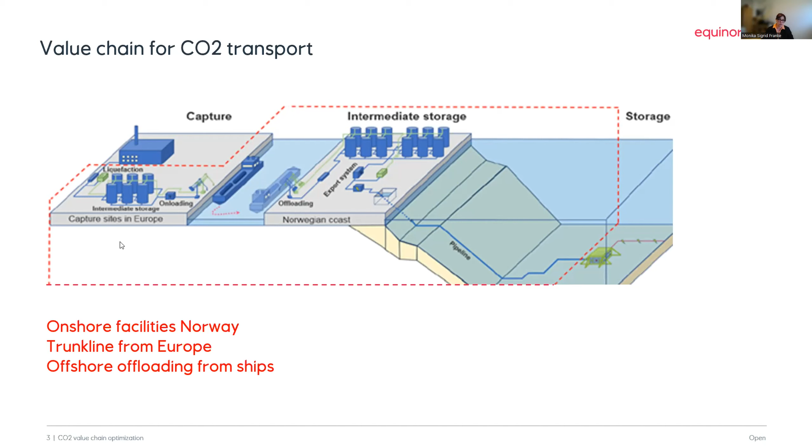So maybe I can just say one sentence referring to trunk line from Europe. I know that many of you know that the trunk line will be operated by Equinor, and it is around 1,000 kilometers where the CO2 will be transported from Europe to Norway as a final location. We can also discuss it more if you have questions later. But that's one of the biggest and more complicated solutions that we have. If I go further, let's see.

So Equinor puts a lot of importance on the CO2 specifications and the considerations in this area or to materials. And what I mean here is the materials selection for the pipelines, but also for the ships. And here we're touching upon corrosion, sulfide stress cracking, hydrogen embrittlement, and so on. And this is connected also to chemical reactions and thermodynamics and hydrates and so on. So that's one of the areas that we divide our research in.

We have also an area into CO2 engineering tools, and there are different activities from cost evaluations, flow assurance evaluations, process simulations, and safety, thermodynamics again. And then we have the last area that is CO2 facilities, and it's touching upon the storage, but it's not purely storage. That is ship transport and offloading structures and controls and what pipelines do we choose and sizes and metering and so on. So these are the three main areas for transport for CO2 that we work on. Let's see, going to the next one.

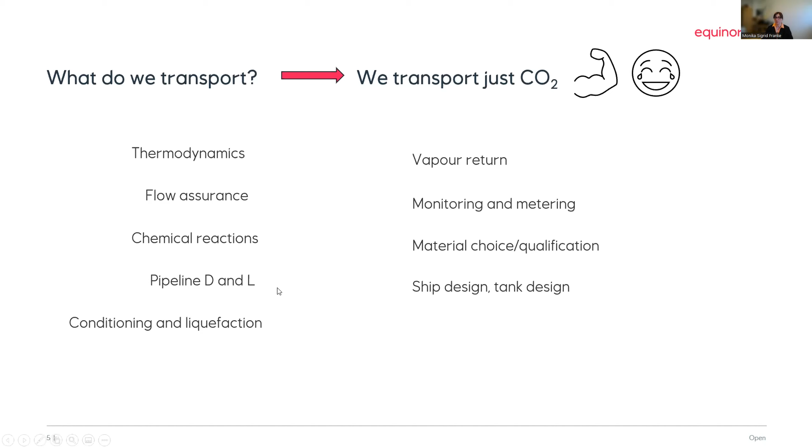Also, material choice and qualification, and that's connected to chemical reactions. How big the pipelines can be, what can we allow, what's practical, and to which extent conditioning and liquefaction will affect the pricing for emitters, as well as what is the result of choosing certain conditioning technology for the impurities. So it's not so easy as we might have thought many years ago. And many of you might know the specification that is published. And by published I mean this is not the last version.

There are always updates, but this is what is published. This is a specification for Northern Lights joint venture. And we have different concentrations of impurities that are listed: water, oxygen, sulfur oxides, nitric oxide, carbon monoxide, different amines, ammonia, and so on.

And this is, in a way, I could say, a shortened list. We are aware that there might be more impurities that can come into the picture. And of course, what we are doing is working further to understand the implication of the impurities.

I wanted also to mention that if we are talking about transport, today, of course, there are different options and sensitivities, but generally when we talk about ship transport, we can refer to temperatures around -25 Celsius and around 20 bar. Of course, we can deviate from these temperatures to a certain degree, and depending on the demands of the different project, this might change, but that's a general.

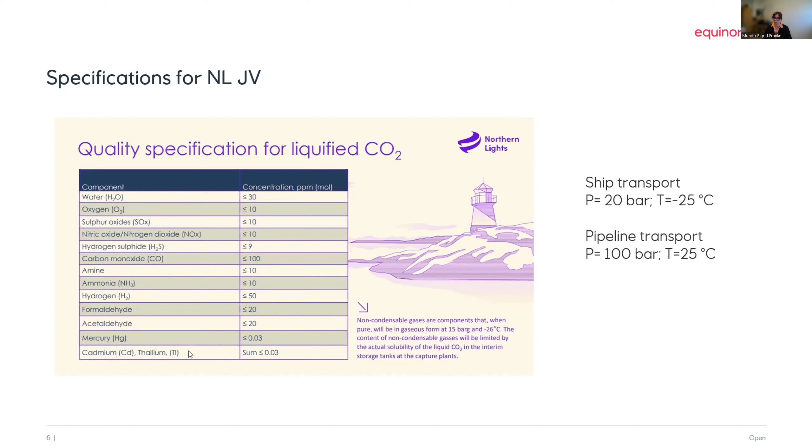And for pipeline transport, what we are referring to is 100 bar pressure and around 25 degrees Celsius. And again, of course, this is a little bit different. We can also say that 4 degrees is relevant if you have a pipeline at the bottom of the seabed, and so on. But that's what we refer to when we say pipeline transport or ship transport per today.

And then I wanted to challenge a little bit. I have shown in the previous slide the Northern Lights joint venture specifications. And these, of course, are referred to by many as strict. And one can see maybe a certain conflict that can arise between emitters and, for example, companies that will receive and store the CO2. The conflict is that different emitters will produce different impurities to different degrees. And the portfolio of different impurities is very, very long, very wide in range, in specifications.

And this poses a bit of a challenge: how is it for different emitters? What will they produce? How should it be handled? Is the specification that we are designing correct and good for both emitters and companies that will handle the CO2? So it's a balance. As you can see, for example, biomass fermentation can have alcohols, aldehydes, methane, H2S, and so on.

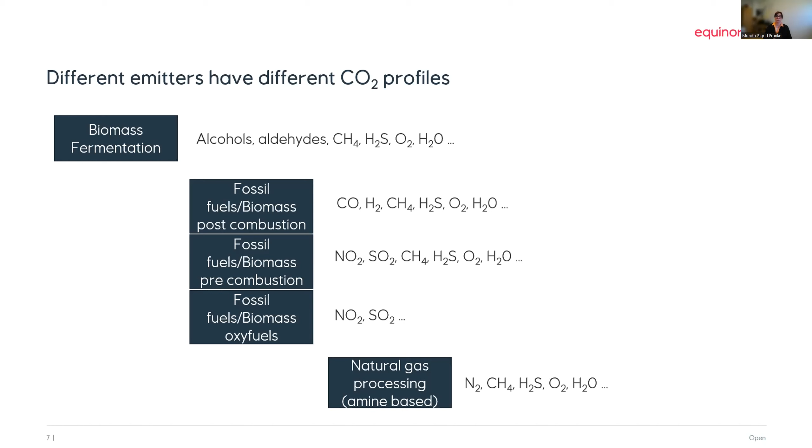And if we have, for example, natural gas processing, as long as it's amine-based, we will also have nitrogen and might have a lot of oxygen and so on. So the profile of the emitters is very different. And now the question is, where is the balance between the cost of purification and different methods, and all other things that the company that has to handle CO2 to store it has to incur. The purification costs can be high, but also the transport and storage can be quite high.

So we can have, as I mentioned already, unexpected phase situations, slugging and cavitation, and because of that, less effective flow. We can have metering errors because of different upsets. We can have chemical reactions that cause corrosion, and precipitation of different species that will affect flow and corrosion. We can have high toxicity and hazardous leakage to nature. And of course we can have hydrate challenges and ice and sulfur and carbonates and so on.

So I think the very, very big challenge in the value chain, as I see it per today, is how to set the specifications so that everyone will be happy. And that is a very big question mark today. But since I mentioned that I will go into key challenges, I would like to touch upon chemical reactions.

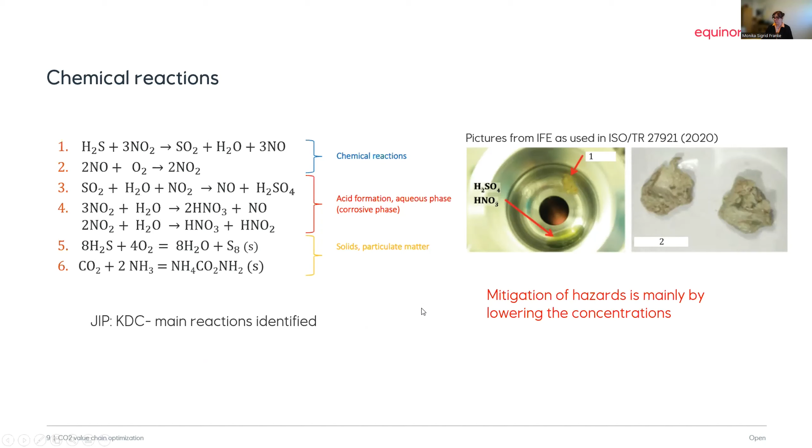And in the picture, you can see that the created acids were in the form of liquid. And then we also had different solid components, like sulfur or like carbamates. So let me go further. And I said I will share with you how the IFE rig looks like for testing chemical reactions.

And here I wanted to also mention that there is also work that Equinor is doing with DNV. I don't have the slides on the rigs, but I wanted to mention it because that's also a very important work where we study sulfide stress corrosion cracking, and also how that relates to general corrosion.

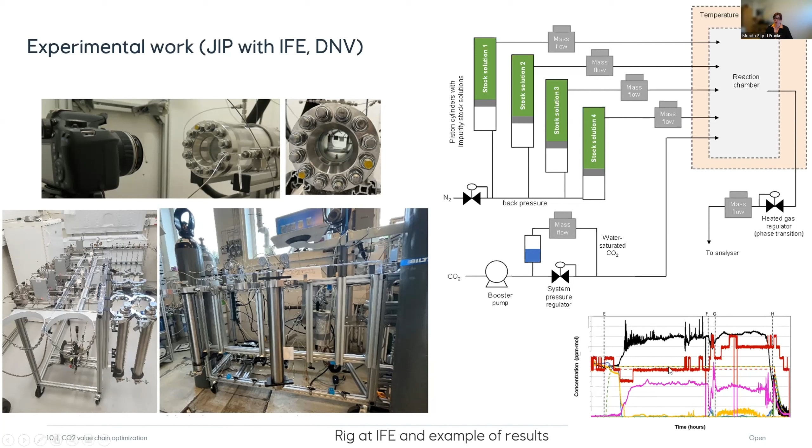And then we observe the reactions and we monitor them with the ProCeas instrument, and you can also see an example of what we get in the right bottom corner. So on the basis of what we see from the analyzer, IFE and the members discuss what we believe has happened, and if we created any different components that can then be tested and evaluated if they have influence on the corrosion and on materials.

And I also wanted to mention the last partner that we also work with, an extensive JIP with Wood, where we actually try to address with other companies all these different aspects of CO2 and their specifications to come to the guideline development. And here you can see that it covers most of the challenges and areas that I have mentioned, from thermodynamics to CO2 compression and pumping, to capture and conditioning, to metering and geological storage, and of course it should also include economics. So we hope that at the end of this JIP, together with other companies, we can come to certain conclusions on how to choose the correct specifications for different purposes.

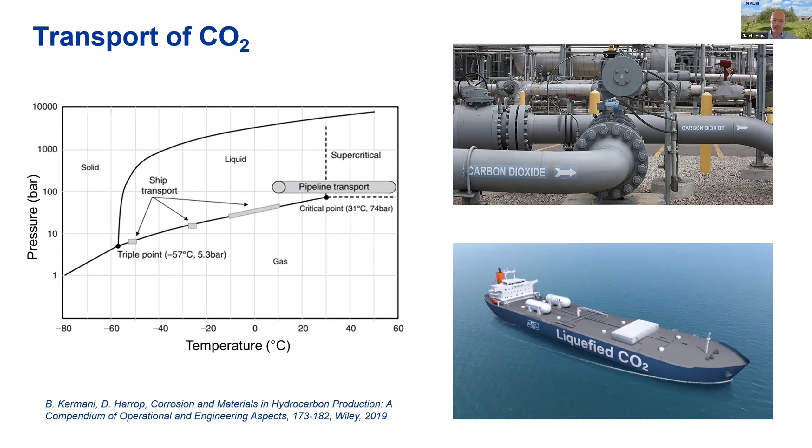And CO2 is acidic. Those of you that do chemistry will know that it dissolves in water and dissociates to form carbonic acid. And the CO2 that's present in oil and gas reservoirs can then acidify the aqueous phase that's transported in the pipeline. And this can lead to several different corrosion mechanisms. So the one that we're mainly focused on in dense phase CO2 is internal corrosion. You can prevent external corrosion of the pipeline using coatings and cathodic protection. But internal corrosion is more of a challenge because you can't really control what's in the fluid to the same degree.

And there's a lot of learning to be gained from conventional CO2 corrosion, but in dense phase CO2, there are a lot of differences as well. And it's those differences that are the challenge and that are requiring us to do more research to understand the corrosion mechanisms and therefore be able to mitigate them. And as Monica mentioned, a lot of the research going forward is about reducing the level of conservatism that is present because of lack of information. So the more understanding and knowledge that we gain about the system, the less conservatism that we have to build in, which comes with additional cost.

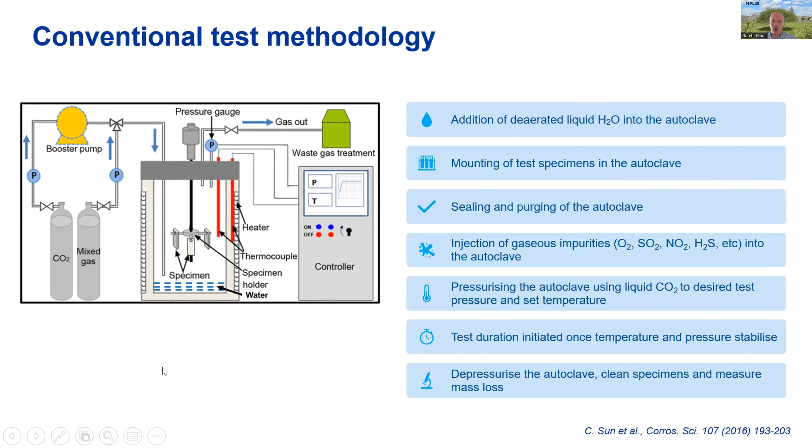Some of the details of the methodology vary, but most of these things that we've listed here are common to all methodologies. Now, the problem arises when you look at the literature, and this was quite surprising to us. We did a very systematic review of published corrosion rate data in the literature. And really, the bottom line is that there is no consensus whatsoever. There is a real reproducibility problem in the measured corrosion rates that are reported by different laboratories, and even between the same laboratories in some cases.

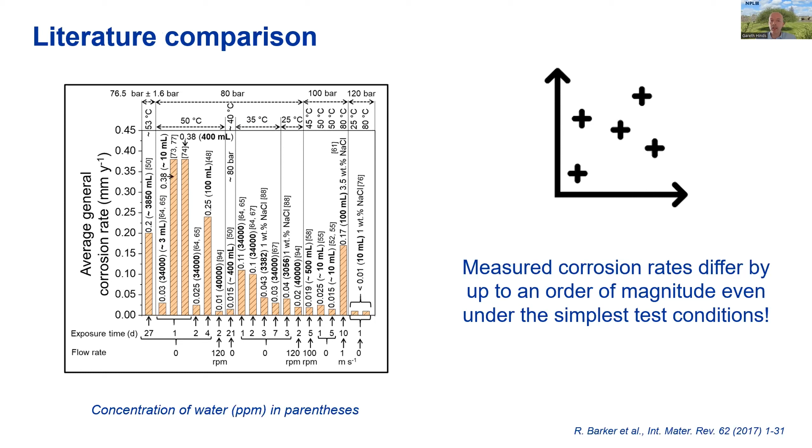So even under the simplest conditions where the only impurity in the CO2 is water, the measured corrosion rates can differ by up to an order of magnitude, a factor of 10. So, you know, this makes it really difficult to compare results from different laboratories or to have any confidence in the reported data that are published in the literature.

So what types of things influence the corrosion rate in a pipeline? Well, there are two types of factors: those associated with the fluid itself, so the level of impurities, the pressure, the temperature, and the flow rate, and factors that are associated with the material of the pipeline itself. So the grade of material that's used, whether it's stainless or carbon steel, whether there are welds there, the surface roughness of the material, and any stress, particularly residual stress from the fabrication of the material.

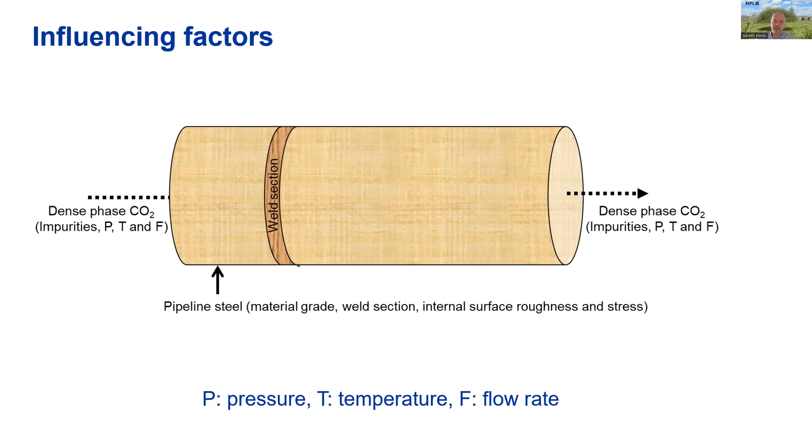But I mentioned water being the most important thing, and it really is. If you can keep water, and that is liquid water, if you can keep liquid water out of the pipeline, the chances are you won't really have any corrosion problems. And of course, that comes at a cost. If there's a lot of water in your inlet stream coming from different emitters, then it's going to cost you money to clean up that stream.

And so it's a trade-off between protecting the integrity of your pipeline over its design life by removing the water and the cost of removing that water. So as Monica mentioned, it's about finding that sweet spot between cost and performance. And we do that by gathering information and learning more about the mechanisms of condensation, the fluid transport, the thermodynamics of the fluid, and the impact of the impurities when they do condense on the corrosion rate of the material.

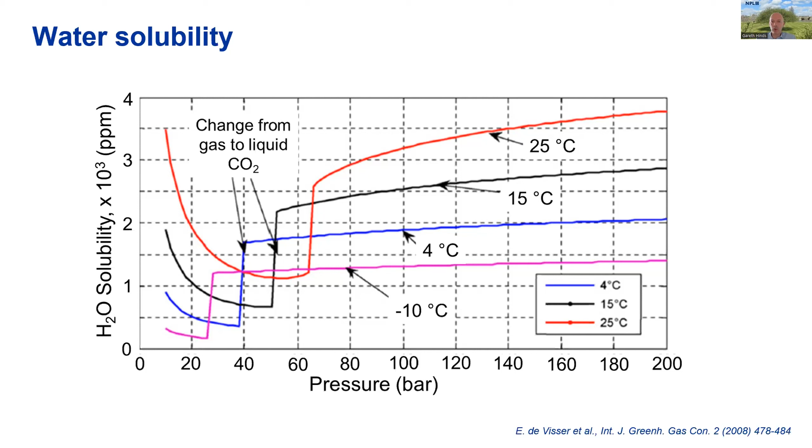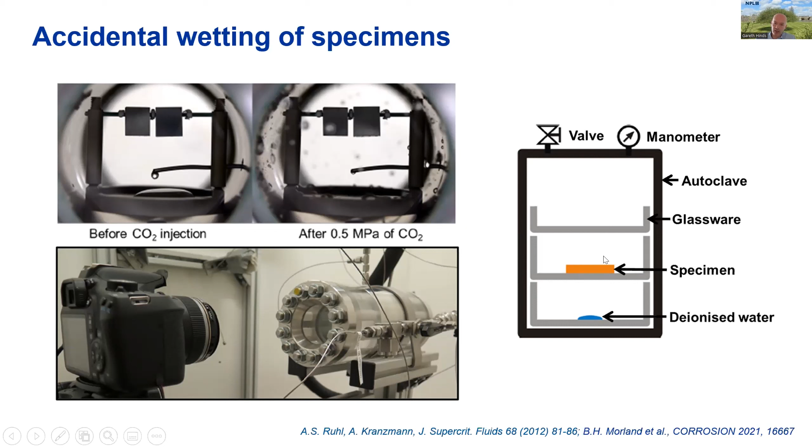From the accidental wetting point of view, these are some nice pictures from IFE that show the splashing of water on the test specimens. And what you can do about it is to separate physically the specimens from the liquid water so that any splashing that occurs doesn't actually impact on the specimens. But not every lab does this.

In terms of test duration, there's actually an issue here for people to be aware of, that the incubation time for dissolution of the liquid water in dense phase CO2 is actually quite lengthy. So it can take up to a day or sometimes even 2 days, depending on the conditions, for all of the liquid to dissolve in the CO2. And that means that if you don't wait long enough for that to happen, you're not carrying out the test under the conditions that you expect.

So to summarize, we do have a reproducibility problem at the moment in the published open literature on corrosion rate of pipeline steels. And this is because it's very difficult to control the conditions in these types of tests. We need a standard test method, and in my organization, NPL, we work on standard test methods. We have a long history of developing standards that can be rolled out to test houses that can generate robust, confident data that allow operators to make decisions, for example, on their CO2 specification and on their material selection.

So we've just kicked off a research program, and in fact, we are also involved in the joint industry project that Monica mentioned on the materials corrosion work package, where we're feeding in information on the development of standard test methods and how to control test parameters and generate more reliable results in testing.

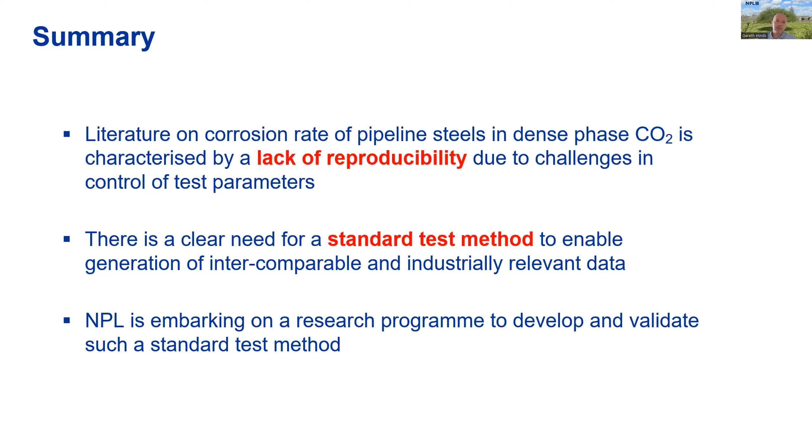So finally, just to step back a bit and ask the question, what are the implications of all of this on the CO2 transport? Well, firstly, at the moment, because of this lack of consensus on corrosion rate and mechanisms and how phase behavior affects corrosion rate in particular, operators need a high degree of over-conservatism in material selection.

So this means selecting a more expensive material in situations where you don't have enough information on the corrosion rate and there is a relative lack of service experience. So projects that are being delivered now are probably overcosted because of this over-conservatism. So this will have to change in the future with more research and with more understanding of these different mechanisms.

The second thing, and Monica's already touched on this, is that CO2 specifications are tightening all the time. They're likely not sufficiently conservative, particularly because of acid dropout. And this is where the different SOx and NOx and H2S impurities in particular can react together and combine with the water to form very acidic aqueous phases, essentially nitric and sulfuric acid that will eat through the pipeline material.

And thresholds for acid dropout are still based on very limited available data, and particularly data at low temperature. So we need to gather more information and more understanding on acid dropout in particular to be able to set more reliable and cost-effective CO2 specifications.

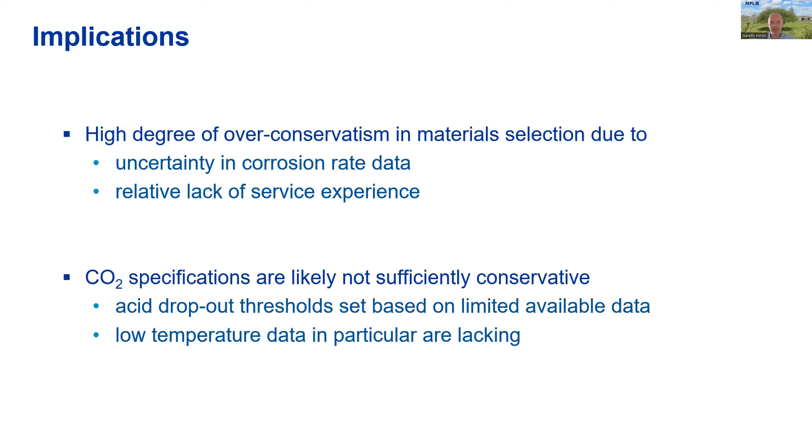I'd also direct anyone who's interested in more information on test methodologies for pipeline steel and dense phase CO2 to our recent review paper, which was published in Corrosion Science.

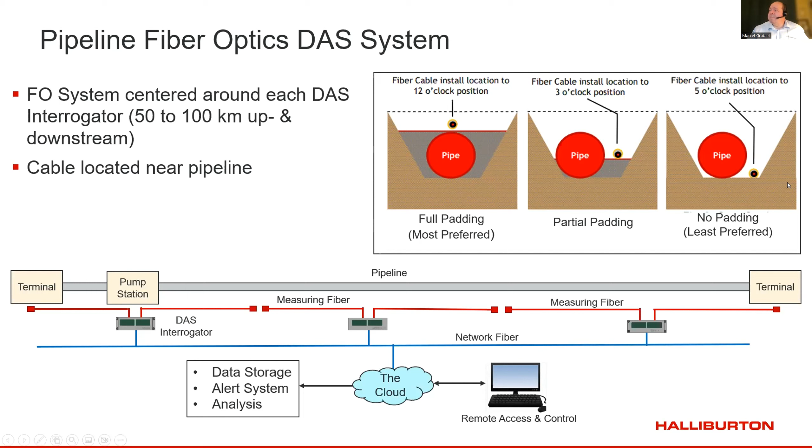So pipeline monitoring, you can do different things. One is event activity, and again, you're trying to figure out what is actually happening at what kind of distance. Those are automatic algorithms that are running and looking at the waterfall plot of the data. So generally you use advanced algorithms and maybe even machine learning, and you're trying to find out, is something happening in the pipeline, like a leak?

Do I have a scraper? How's a scraper or pig that goes through the pipeline behaving? Do I have any seismic events, animal movements, people walking by, vehicle movements? There might be some tree or brush cutting. There might be some excavation. That's always a danger for pipelines, because sometimes they run over a pipeline with an excavator, and now you can get a really big mess.

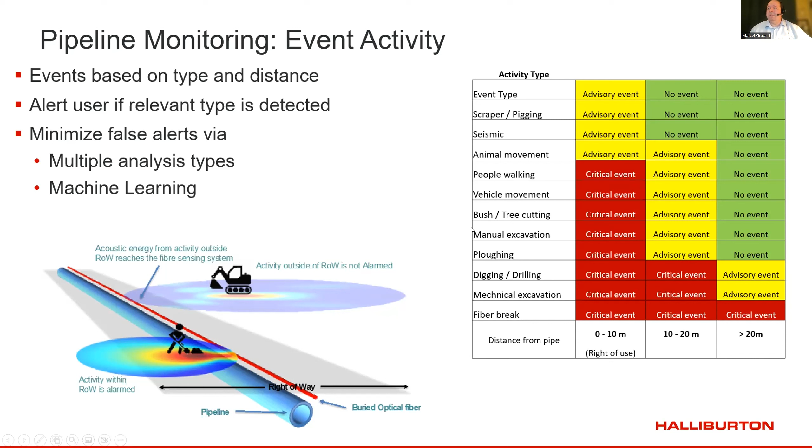So we are trying to figure out at what distance things happen, and as you get closer to the pipeline, you're getting a more urgent message to the operator that something's really happening, and we are trying to identify the event, and then they have to react to this, and that includes leaks. That's one of the most important parts of taking those measurements, because we are trying to figure out where and when those leaks are happening, and trying to detect those early, hopefully before we are even getting that leak.

And there's different modes that we can do. We can do negative pressure pulse. That's a methodology to find sudden ruptures. Now you have 3,000 psi in the pipeline. Suddenly, through a corrosion event, for example, you create a hole, and this ruptures, the CO2 is going to come out, and it's going to create the pressure pulse up and down the pipeline, very strong, and then you get the gas streaming out,

which is going to create a turbulent flow, similar to flow through an orifice, which is a signal that you can pick up very easily and identify. There's orifice noise, which is if you have flow through a hole, and generally it's a slower developing leak. You don't have the sudden rupture, so you don't see the negative pressure pulse. You mainly see the acoustic signal of the fluid going through the hole.

Then you have ground heave. You have fluid exiting the pipeline, and it's going to displace the ground. As this is being pushed towards the pipeline, towards the fiber, you're going to bend the fiber slightly out of place, and then you can identify that something's happening over there.

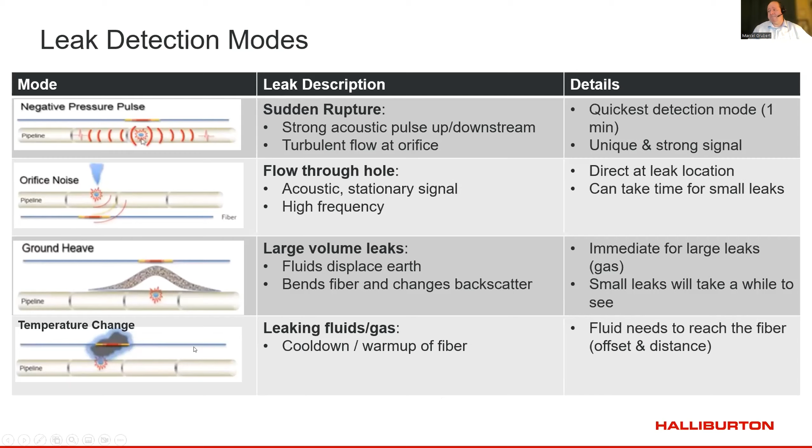And the fourth part is what's happening specifically if you have anything that develops from liquid back into gas, because it cools down pretty rapidly. You actually get a very cryogenic effect, specifically with CO2, and you can pick up the temperature changes as you get a leak. Everything cools down around that, and the bad thing is the pipeline generally gets very brittle when that happens. So just to give some quick examples.

We need to conclude because we're in discussion time already.

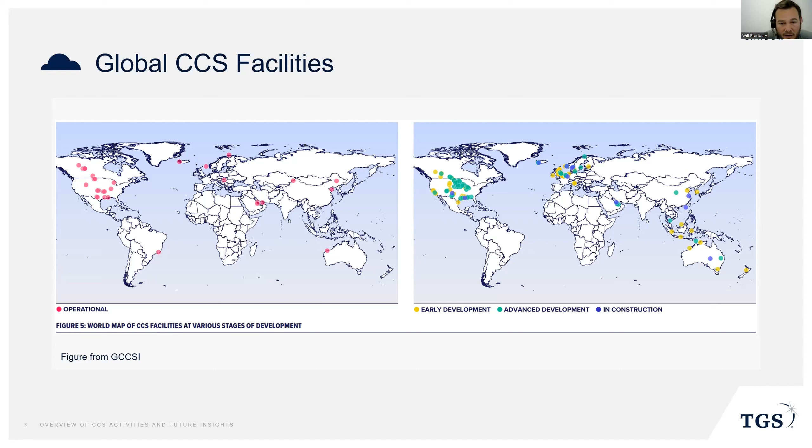A bit of an overview here on the different systems that are working in different parts of the world. So over in the US, if we start there, a lot of projects in advanced development. There's early development projects, there's in construction, and as we saw previously, there's quite a bit actually operational at this time as well. I think we're going to see that this will increase now that the Inflation Reduction Act is in place. 45Q has actually been extended as well. So those tax credit schemes are driving new projects across the region.

Very high level overview of what that might mean. You can see you do get a tax credit, $85 a ton for storage, $60 a ton for enhanced oil recovery. And then we'll drop into this one on the next slide, but $130 to $180 for direct air capture with CCS.

If we move over to Europe, it does certainly appear on the surface to be quite a more complex system, but obviously subsidies are playing a role here. The emissions trading scheme, we've seen certainly development in the price of that. And then within Europe as well, there are national level taxes, there are different credit schemes and so on. So we won't go into the detail of that one. There are a vast number of those different projects.

When it comes to the Asia Pacific region, then perhaps not as mature as the other parts of the world in terms of the regulatory environment or credit systems, but they do exist in this region. But I think what we're actually seeing in that region is more the development connected to LNG. So you do see projects, certainly like Gorgon. I think most people are aware of that. Gorgon is an offshore development, and then the LNG on Barrow Island. And then when we get to Moomba, that's the Cooper Basin project, again, connected to LNG.

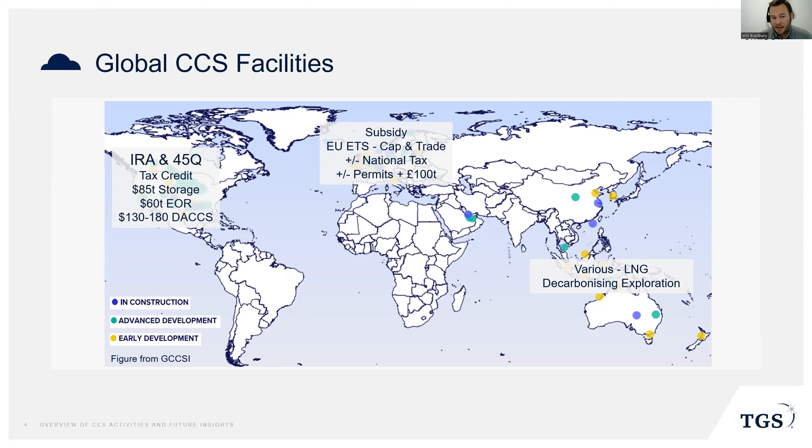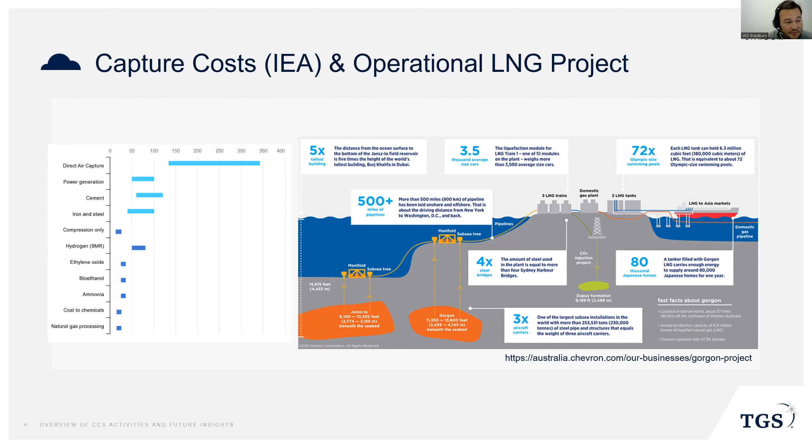What's quite interesting also about projects like this is it's a single E&P operator, or a consortium, I should say, a group of E&P companies who are operating it. So I think a lot of the discussions around the complexity with different projects, where all of the emitters essentially have different specifications of CO2, creating the administrative load and communication of technology and so on, could be more of a challenge for the kind of projects where you're looking at the decarbonisation of onshore industries. And many more stakeholders is probably the key thing to say in this regard, and they will all have different CO2 coming into the system.

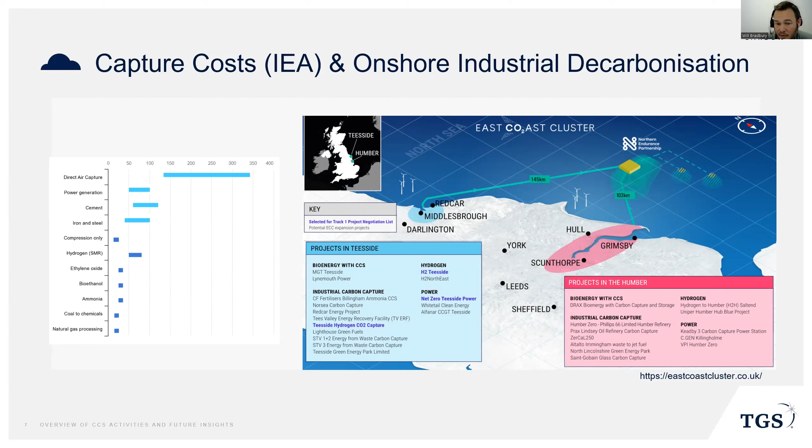And I do see that as two different types of developments, and we'll see how those develop, this sort of hub and spoke versus the LNG developments run by small groups of experienced E&P operators offshore. So a little bit of a look towards what will happen further.

So going back to the graph on the existing operational CCS facilities, and I'm sure some of the other speakers later on in this session will talk about this a little bit more. But we see these sort of gas-linked projects. Gorgon is one. There are others in Europe around Sleipner, Snøhvit, Moomba in Australia, and there are also many more. These are single point-to-point type projects from emitter to storage site. When it comes to the growth that we see linked to industrial decarbonisation, these tend to be much larger consortia, or at least there are many more stakeholders in projects such as the one I showed previously, the East Coast cluster.

Multiple sources of that CO2, and I'm sure there are challenges related to optimizing transport distances or other sensitivities, and so on. And I think this is probably one of the causes for why you have different incentive schemes in some of these different areas, in that you need to create the market for it, and then those projects need to be developed over time as well.

So really, that's a very high level and short overview of what's happening around the world. I think these hub and spoke industry adjacent programs, and then these LNG projects, will have different growth mechanisms and different incentivizations. For example, the LNG will grow as that LNG market grows as well, and hopefully that will grow in parallel. And we do see growth in that market. So I think there is going to be an increased need for monitoring technologies going forward into the future.

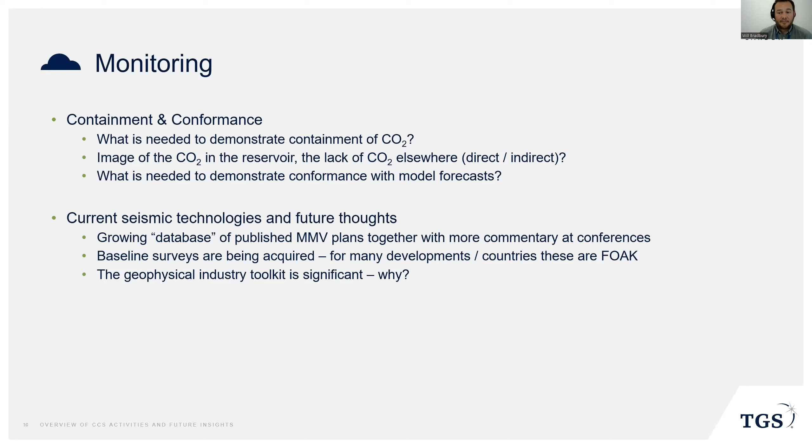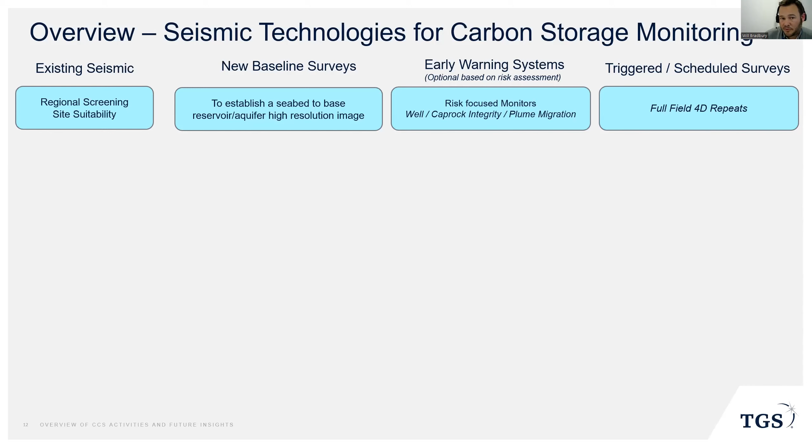A little bit, first of all, on seismic technologies. So obviously we have existing seismic data for regional screening, site suitability, new baseline surveys, and then potentially early warning systems. And we heard some talks about some of those yesterday as well. And then the full field 4D repeat, which comes later. As we move through that system, talking really about baseline surveys here: if you have a short duration survey, then you can have a slightly higher run rate on your cost and potentially a higher environmental footprint as well. When it comes to early warning systems, you need very long duration monitoring, which means you need a very low run rate, and you probably don't want to accept a very high environmental footprint.

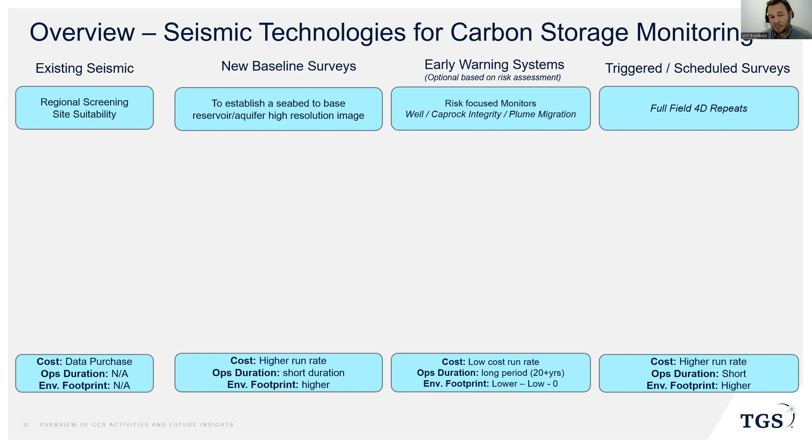Then of course your scheduled or your 4D repeat will be the repeat as well. So into that box, we put a number of these different technologies, really baseline surveys, DAS VSP, XHR, it's a short streamer solution. You have long streamers, you have nodes of various different configurations. In early warning systems, then we might talk about in-well fiber as a passive sensor, or as a DAS VSP application where you have an active source.

And we heard from the folks at Spotlight yesterday on using a very small number of nodes. Then we move into the repeat. As far as I'm aware, in terms of what's been done, we obviously have seen a number of longer streamer applications done for baseline surveys and so on. We've seen early warning systems, so fiber optics are installed many places around the world connected to oil and gas.

But I think as we learn more and more about these monitorings, how we apply those technologies, then we're going to be able to refine certainly diagrams like this. And I'd certainly welcome thoughts and considerations on what else should be added in here or what should be removed and so on.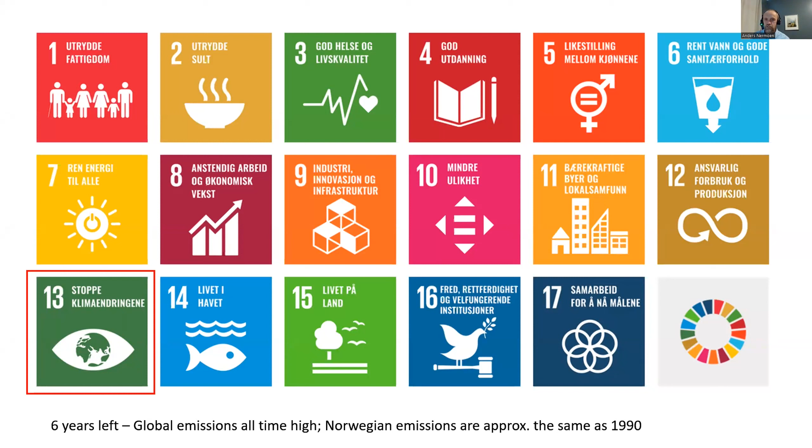So just first, we are committed to the UN development goals, and of course, curbing the climate change is really a key for me personally and for our institution. The global emissions are all-time high. The oil and gas recovery is all-time high, and of course, in Norway, the emissions are approximately the same as in 1990. And we know that a stable climate is a climate where the incoming radiation equals the outgoing and the reflected radiation.

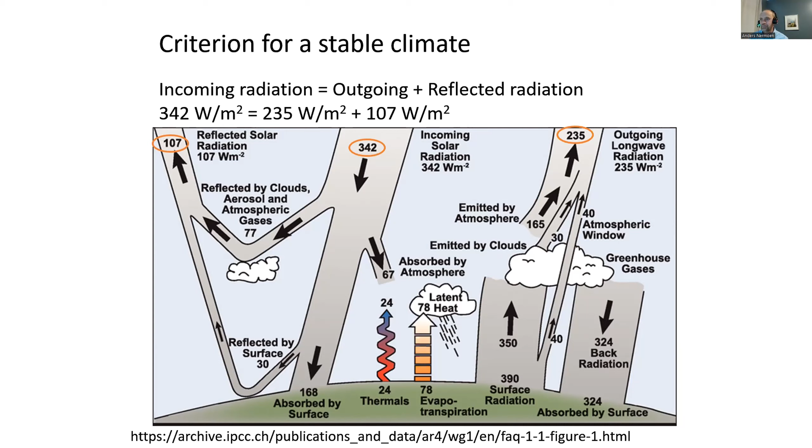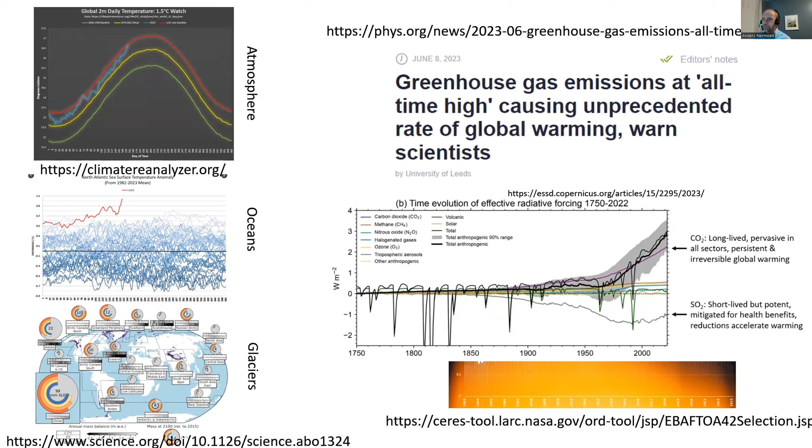And we learn. I always read phys.org as a physicist. We read that the greenhouse gas emissions are all-time high, and we know that this leads to an energy imbalance of approximately 1.4 watt per square meter, which equals 9 Hiroshima bombs. Was it each day? So there is a massive energy surplus, and of course there are different reasons for it, and CO2 is one of them. And we know that this leads to an increased atmospheric temperature, ocean warming, and melting of glaciers. And the questions are what the consequences are of these. So we learn a lot of this in the IPCC reports and the Paris Agreement.

And this session was called something with net zero society, and I think that we should address what that really means. And it means that basically, given the longevity of the CO2 molecule in the atmosphere and the prolonged nature loss,

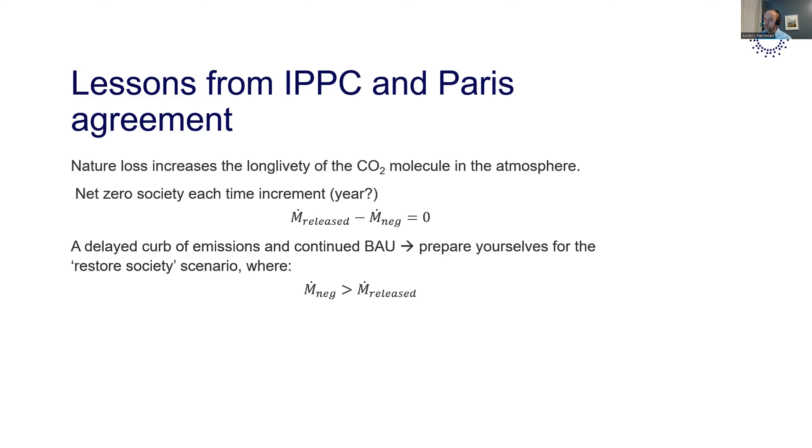making the longevity even longer, we know that each time increment we need to have net negative solutions that equal what we release. And if we delay curbing the emissions and we need to take the climate back into a stable zone, we need to prepare ourselves for the restore society that would come after the net zero society. We are not there yet, but we could end up there because we have natural tipping points. So,

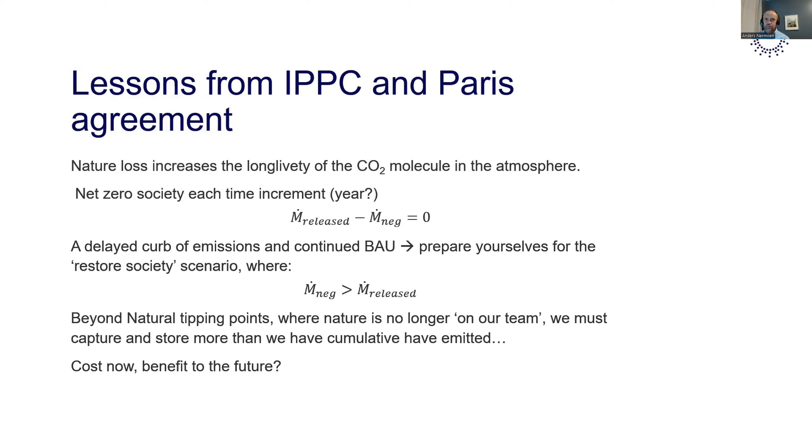and of course, CCS and carbon management is really important in order to meet these requirements that have been agreed upon and signed by practically all nations. And we're dealing with costs now and perhaps benefits for the future. That's the concept. And just to understand the anthropogenic CO2 in the Earth's atmosphere, it's important to know that we can avoid increasing, but this is not the same as reducing the emissions that we have today.

And it's kind of painful because we need to stop doing things, right? And that's not really in our heart, and we don't really have any technology for doing that. And so it's really difficult. So we're going to continue to emit, and then of course we need to have net negative solutions from the atmosphere or from the oceans.

And this could be technology-based solutions, and of course we have the nature-based solutions. A big chunk of those, and of course they can be nurtured and facilitated. Let's say reforestation of the Sahara, right? Could be something. And here we see the role of CCS when it comes to carbon management. Dealing with

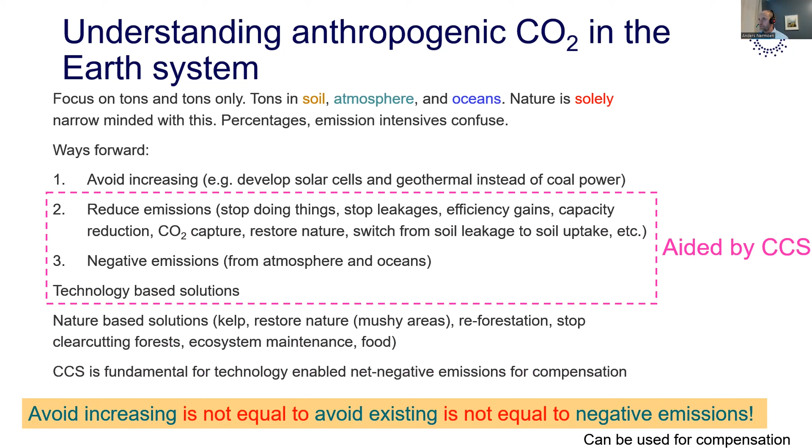the energy transition. Well, if you look at the history of energy use, we have traditional biomass here in the bottom, and coal and oil coming on top of it. It's basically molecular based. And once we find one new source of energy, we basically combine that with increasing the previous ones. So we have had an explosion of energy in the last 250 years or so. But there's been a dawning green shift the last 25 years, and we are entering now the green energy shift. So what does that mean?

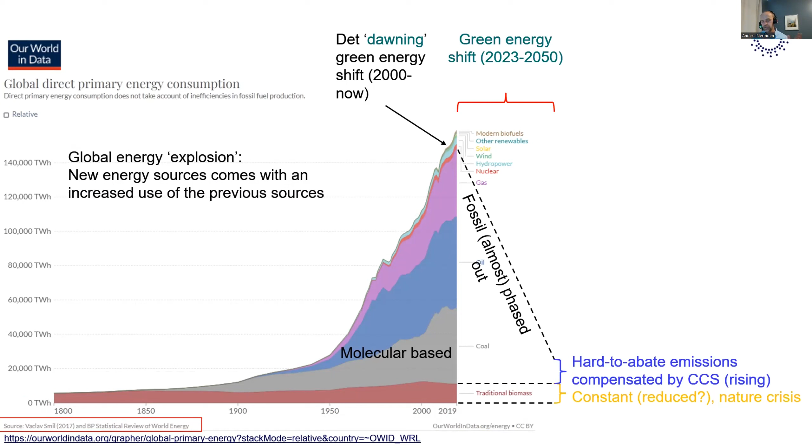Well, we cannot really rely on increasing biomass. I saw that yesterday, and I don't think it's realistic because we have a nature crisis to deal with at the same time. We could have reforestation. We need to phase out almost all fossil consumption, fossil sources. And of course, what we're left with needs to be compensated by CCS. When you read these pathways towards net zero society, this has been rising. 2 years ago, we talked about 5,000 million tons, 5 gigatons of CCS. Now, the latest is doubling that to 10 gigatons per year of storage.

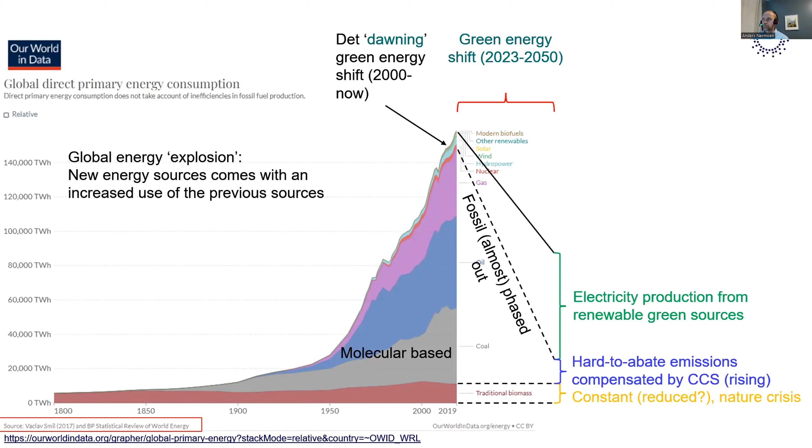And when it comes to the electricity, we're going to boost it, and we're going to have reduced consumption and efficiency gains. And is this really possible? Well, yes, I would argue it's really possible. 75,000 terawatt hours per year for 10 billion persons is, if you break it down to the persons, 7,500 kilowatt hours per person, which is 20 kilowatt hours per day per person. So it's entirely possible. So we can do this. The question is if we want it.

And so basically we have a build-out problem, but we also have an avoidance problem. The build-out problem, I think, is fully doable. Avoiding, we don't have any technology for that. Then we deal with regulatory measures and, of course, social engagement, social activities being much more important. So in order to facilitate compensating measures, we are going to go through now 3 examples of value chains and business models that we've developed.

So the first one was in the ECOBASE project, where we were establishing CO2 value chains for enhanced oil recovery in Southeastern Europe. And basically, it relies on 2 premises. First, that it is the only industry that can uptake, let's say, 1 million tons of CO2 per year, in that order of magnitude. Premise number 2 is that it is a segue for the oil and gas industry from producing oil and gas to using CO2

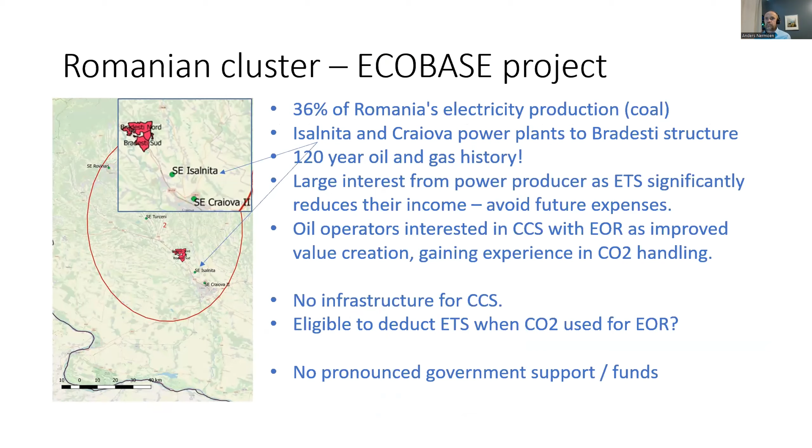We were looking into 2 coal-fired power plants. They have a really long history of oil and gas production in Romania, and basically we were evaluating decision alternatives when you're dealing with the oil company that could meet up with the coal-fired power plants. So we evaluated the outcome of these decision alternatives.

So basically, they could continue as of today, the do-nothing case, which would give you profitable going forward when we include all the costs, including ETS, etc. That has exploded since then. Or we could have a system where we develop the field and we have a full field immediately, or a pilot, and then go to full field development. And then we calculated the oil production as function of CO2 injection and the CO2 intensity. And we generated estimated monetary value of these decision alternatives.

We also went to Turkey, where we evaluated the Bati Raman oil field, which is a heavy oil field from a carbonate reservoir. It's the biggest oil field in Turkey, and they had a primary production period until the 1980s, 84, where they discovered Dodan, a natural CO2 deposit, 70 kilometers away from the oil field. And they developed a pipeline between these 2. This is not pure CO2, and it's been running for 40 years.

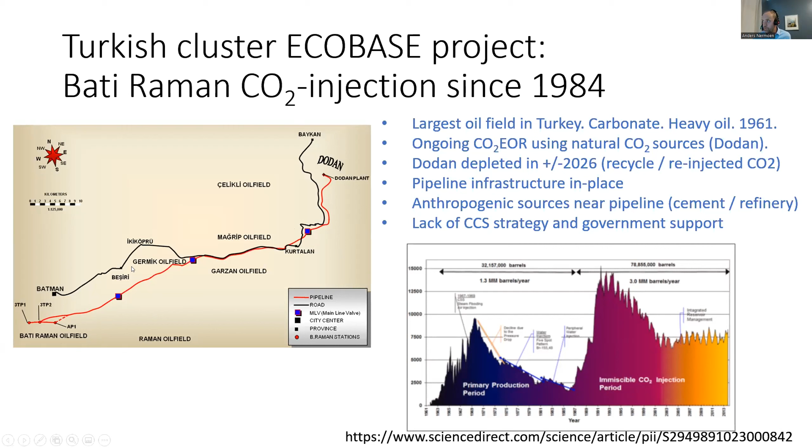But the problem they're facing now is that Dodan is near depleted. So of course they started to recycle and re-inject the CO2 at the production site. But still, they always lose CO2, so they need more CO2 to have this oil field up and running. So there's a cement factory here in Kurtalan, and then there's an oil refinery south of the Bati Raman oil field that we were working with to develop this decision tree and evaluate the monetary value for the different alternatives.

And basically, there's positive net present value, even from the business as usual, if you have the refinery capture, refinery and cement at different times. So this basically gave us some confidence that we could work with different players in the field, and we could go forward.

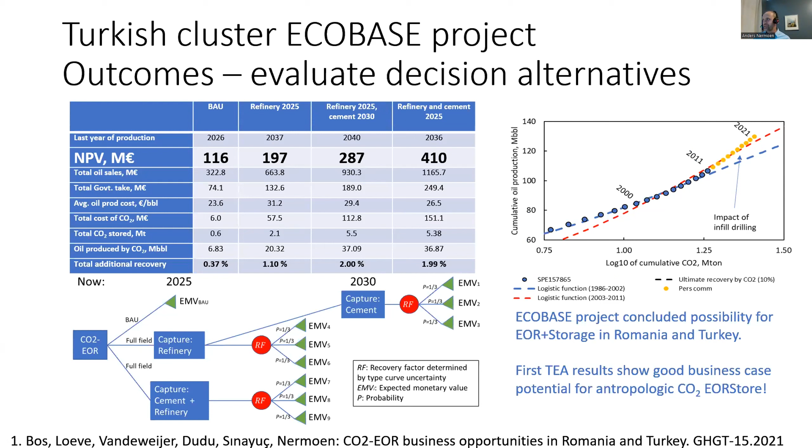We also have friends in the Czech Republic that we worked with before, and we recently developed a project, which ends next year, where we want to mature an existing oil and gas field to become a CO2 storage pilot. This field was discovered in 2001 and has been operated by MND. The premise here is that having storage available is a fundament for carbon management in any CO2 intense region, because there are lots of CO2 emitters in this region. And we used the EU storage directive deliberately to generate the work packages in this project.

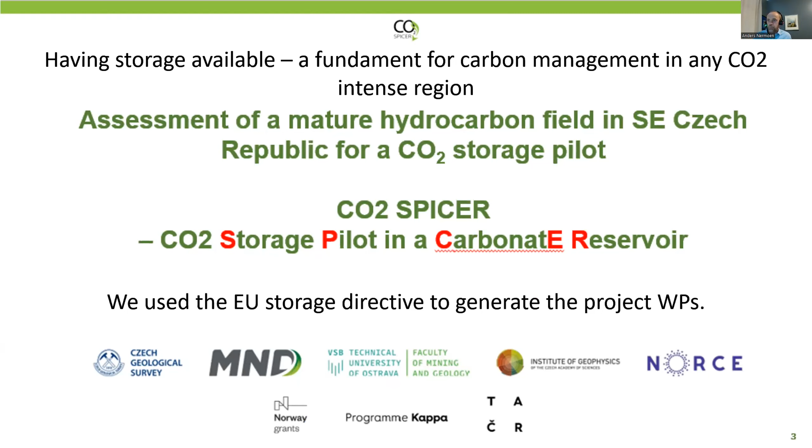There is a lot to say here, but closest to my heart is geomechanics. So I'm going to focus on that. The illustration is basically that the geomechanic work is used in all other work packages, when it comes to the geological model of the storage complex, dynamic modeling and simulations, what pressure domains we can operate safely within. We are working closely with geochemistry. How does the chemical reaction lead to mechanical changes?

Risk assessment is obvious. And of course, we work together with the monitoring plan and the scenarios for future site developments, because we are constraining the total injected CO2. I'm going to show you this now. But of course, there are cross links in all other directions here as well.

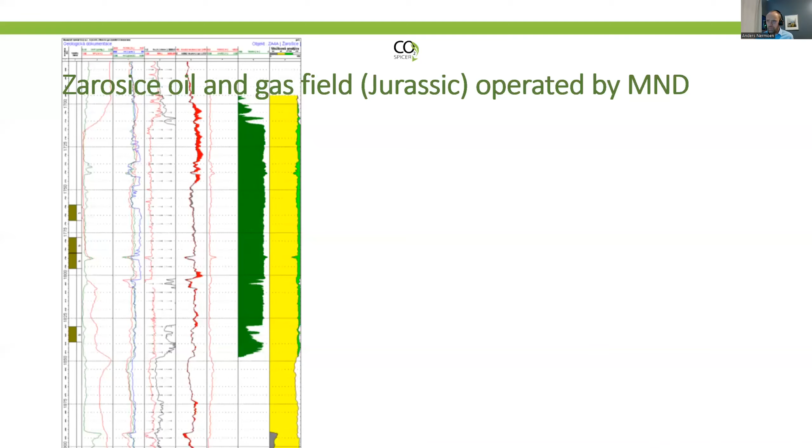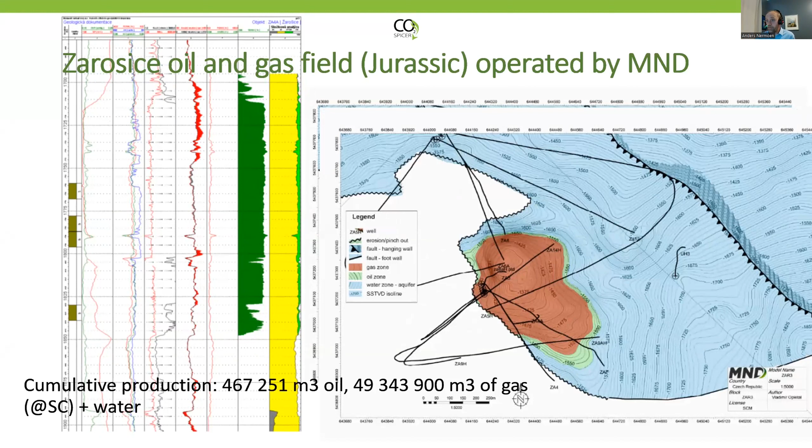We are basically here at the border between Austria and Slovakia in the Zarosice field, and we are looking at the Flysch belts in the Vienna Basin. We are targeting the Jurassic formation, and here you see the fluid displacements, originally oil, gas, and water, and then it has been producing for a while, and the gas cap has expanded, and the oil zone has lifted up, and it's approaching depletion, and we're looking at how to use this asset for CCS.

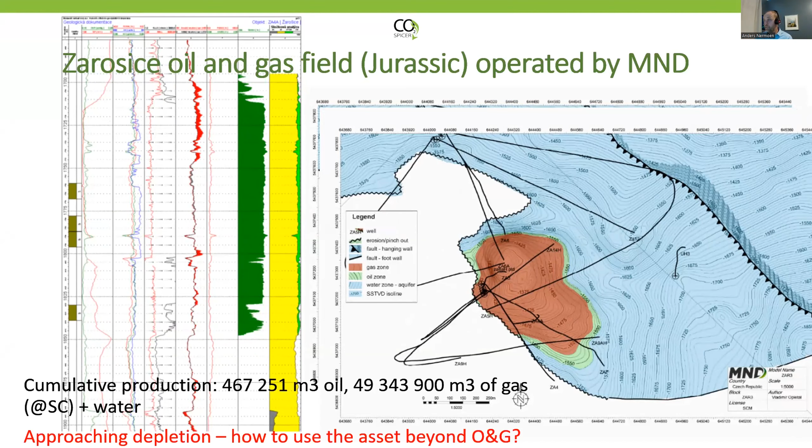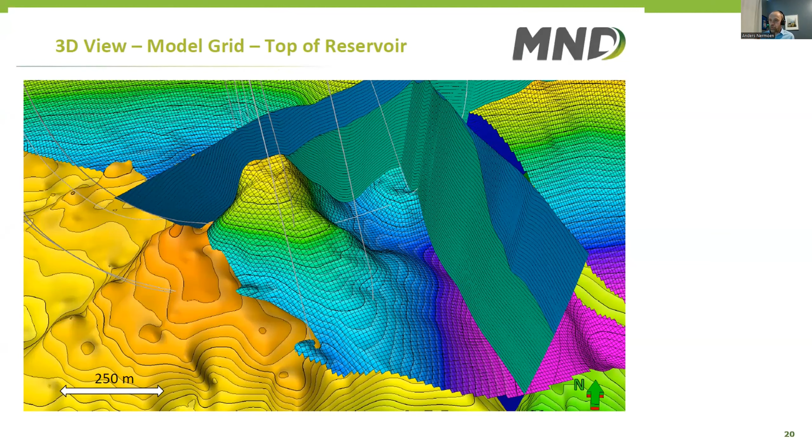A 3D picture of this thing, and we are mapping the different formations here, and we are determining the strength of these rock types. Based on the oil and gas company's seismics and geological model, there are no weak planes and faults crossing through the main storage unit. So when it comes to geomechanical assessment, we needed to rely on the rock strength itself.

So basically you do that and you evaluate in this tau-sigma space, where tau is the shear force and sigma is the normal force, and you have these Mohr circles, and you take the tangent of those and you calculate the stresses needed to break the rock.

And then we estimated what the stresses are in the field. And when you combine the strength of the rock here and the possible stresses, there are some uncertainties there. Well, it looks all good, all safe. We can just go along. But then we were interested in what happens when you start to re-inject and cool down the reservoir.

So then it's not that simple when you're doing it in tau-sigma space. Then you need to do it in PQ space, because previously the stresses are shown as circles, and in QP space the stresses are shown as dots. And Q is the deviatoric stress, the principal stress differences, and the mean effective stress is basically the average stress minus the pore pressure.

And when you repressurize, you reduce P prime. Basically, you push the point to the left. And if you cool down the reservoir by delta T, you reduce the side stress. Given that it's weight dominated and it's constrained on the side, we can calculate the side stress reduction, basically increasing Q and reducing P further. And of course, all of these factors have been experimentally derived.

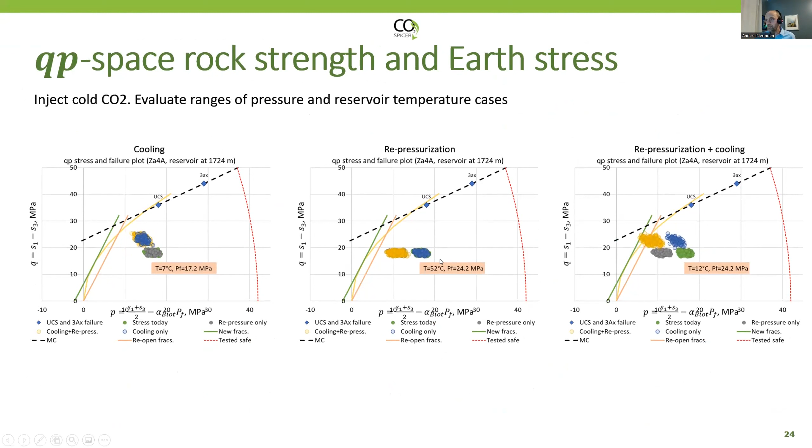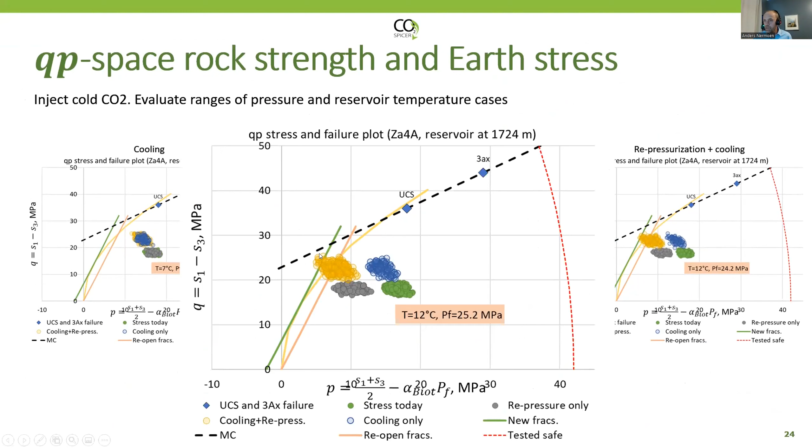And when you do that, you see that cooling leads to a shift upwards. Repressurization brings you to the left, and for the combined effect, because we are sampling from probability density functions, we can calculate the number of instances that lead to failure. And then we can develop these phase diagrams where the probabilities of failure are calculated with regard to reservoir pressure and injection temperature.

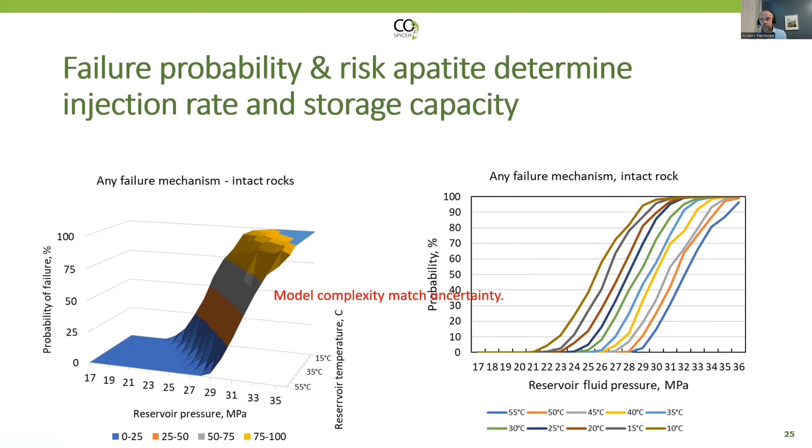And of course, combining the failure probability with the risk appetite is important when you want to assess the injection rate, if you need any warming up of the CO2 before you inject. And it's also important to determine the storage capacity. So we made here a model that was matching the uncertainty in the field.

So how this is integrated into the whole system is what we are dealing with in the STRATEGY CCUS. And I see that I'm running out of time. But the purpose here is that we made a model that evaluated scenarios, which is a future pathway to a series of events. It's a point estimate. And we used this for a regional comparison of 8 different storage regions in Europe. It enabled us to quantify the consequence of modifying the concrete and practical build solutions, and it forced us to agree upon some basic principles for the CCUS economy.

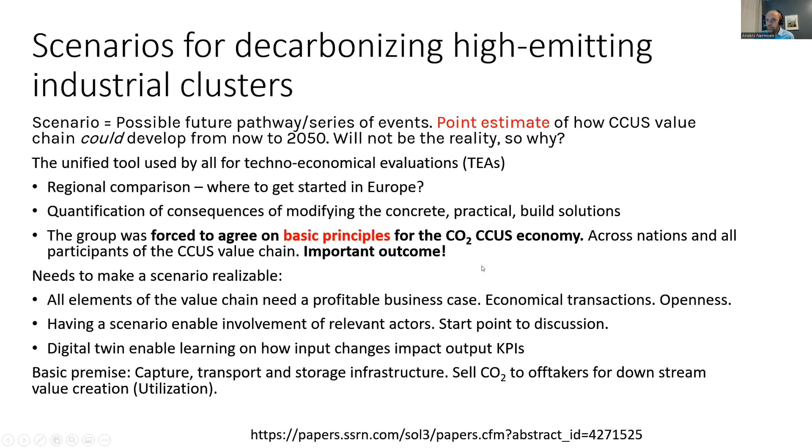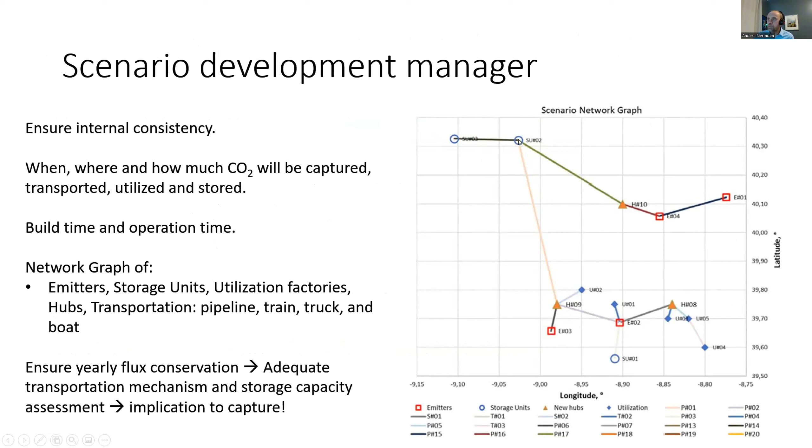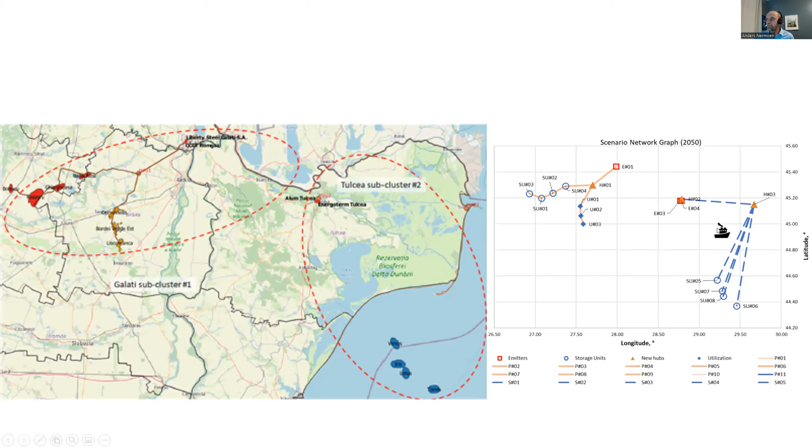It's basically built on scenario network graphs where we connect storage units, hubs, and emitters to each other, and we calculate the capacity of each segment of this network and each node, the storage location, emitter, and we get to regional key performance indicators on energy use, capital expense, operating expense, and build time. And we have different transportation units, and it's quite an achievement, I think. It also uses what we call global inputs. I'm out of time. That goes through the whole analysis, and we are able to generate the KPIs for the different units.

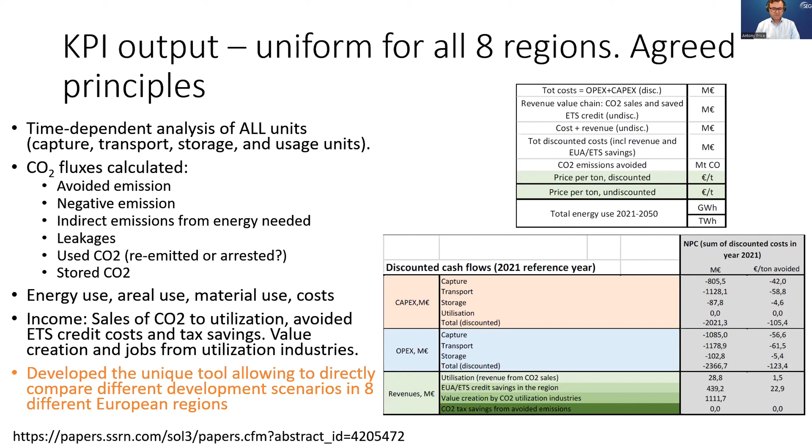My name is Kirsten Haaberg, and I come from Gassnova. Gassnova is a state-owned enterprise that was established in 2005, and it should advise the Norwegian government on CCS through the CLIMIT program, which I will talk more about, the Technology Centre Mongstad, which is the test facility, and the Longship project that will set sail next year when they start injection into the underground in the North Sea. It should also facilitate development of technology and competence to ensure cost-efficient CCS solutions, and that's where the CLIMIT program comes in.

We support in CLIMIT both standalone projects and also projects that run for longer periods and that follow naturally in the development to higher and higher TRLs. We'll talk a little bit more about that split later, but we're, for example, very proud of this

Aker Carbon Capture technology project that has run since 2005 with the test of 100 different types of amines at NTNU and Tiller in Trondheim. And then they ended on the amine that Aker Carbon Capture are using today, and it was further tested at TCM, and then they built a mobile unit that is now used, tested and further developed at Norcem, and is then also part of the Longship project. And in addition, we have, of course, supported many other projects in both capture, transport, and storage domain.

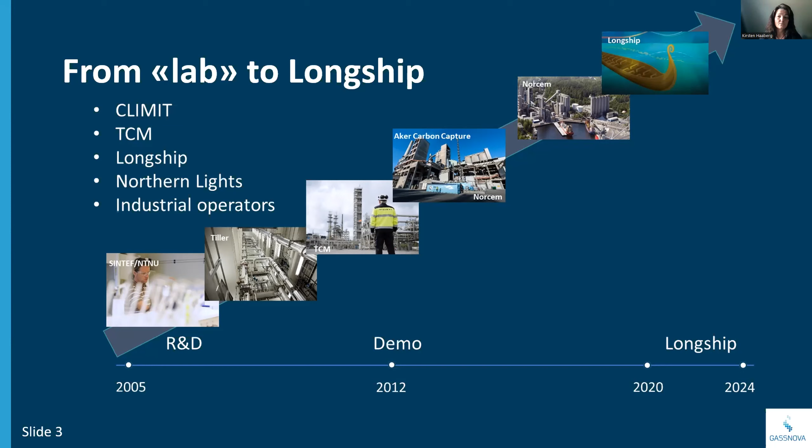And all along with the increasing TRL, we wish that there is an increase in the industry participation to show that the industry is really interested in the technology, that it has a life after the project has ended.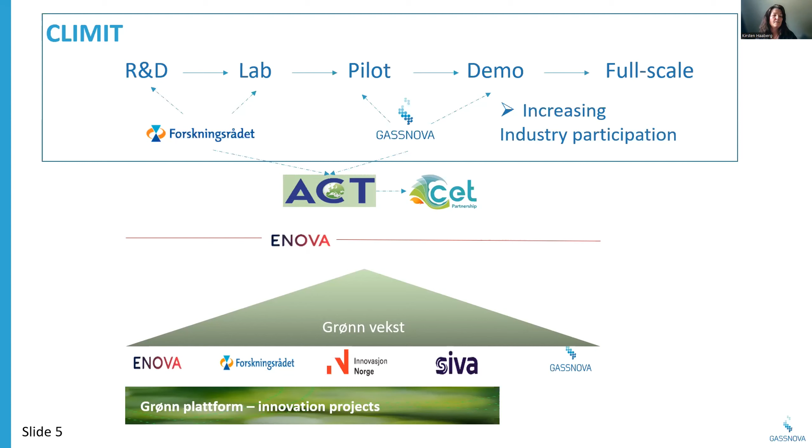Then we have something called Green Growth, which is more a deal to strengthen and develop the coordination and cooperation on green growth. And it is run by these 5 companies here, Gassnova, Siva, Innovation Norway, Research Council, and Enova all together. And then you have Green Platform, which is run by these 4 above here, and they're more on the innovation side of projects. So there are several different ways to get funding within Norway, but also in international projects.

So what kind of projects can get support? You have idea studies. They're like smaller studies to grow the project into perhaps a larger application. And the maximum support there is 200,000 Norwegian kroner and 50% of the total cost maximum. Then you have technical economical feasibility studies and support for testing technologies on pilot scale. Those are the 3 main types of projects that we give support to. And normally it's 50% support, but the ESA regulations give the variations here, depending on if you're a small company and what kind of partnership, etc.

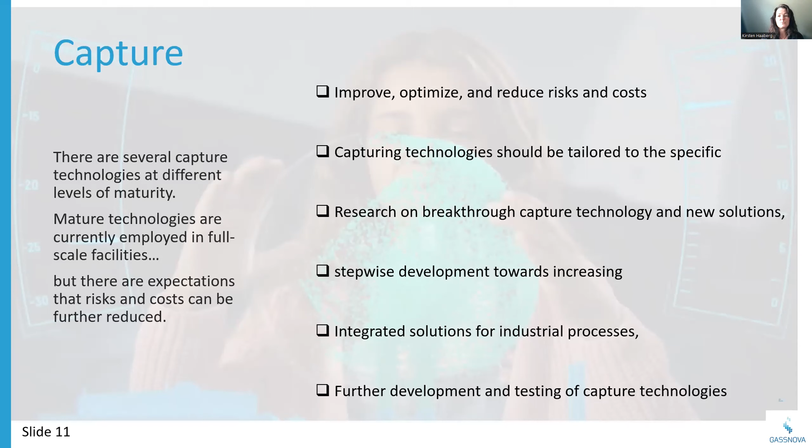One should look into capturing technologies that should be tailored to specific industries and consider factors such as available waste heat, space requirements, electricity consumption, and tolerance for various types of flue gas compositions. There should also be research on breakthrough capture technology and new solutions, including development of sorbents, solvents, membranes, etc. There should be a focus on faster stepwise development towards increasing maturity and substantiating the long-term potential for a capture process.

There should also be integrated solutions for industrial processes; simultaneous CO2 capture, hydrogen production with CO2 capture, and air or ocean capture are also areas of interest. And finally, there should be further development and testing of capture technologies ready for scaling up to pilot or demonstration scale, including low temperature capture, solid sorbents, oxy-fuel technologies, and hydrogen combustion.

On the transportation, the program can support projects that will help reduce risks and costs for CO2 transport. In addition, the program can support the development of technology and innovation that facilitates the financing and commercial operation of CO2 transport systems. And here relevant areas are how impurities in the CO2 flow affect thermodynamics, characteristics of the CO2 mixture, the corrosive environment, precipitation, and flow conditions in the transport system.

For materials, research into and testing of materials throughout the value chain is of importance. And then one also should develop software for simulation of multi-phase CO2 flow. Design of ships and loading and unloading systems, including offshore unloading to liquid intermediate storage or direct injection into storage formations.

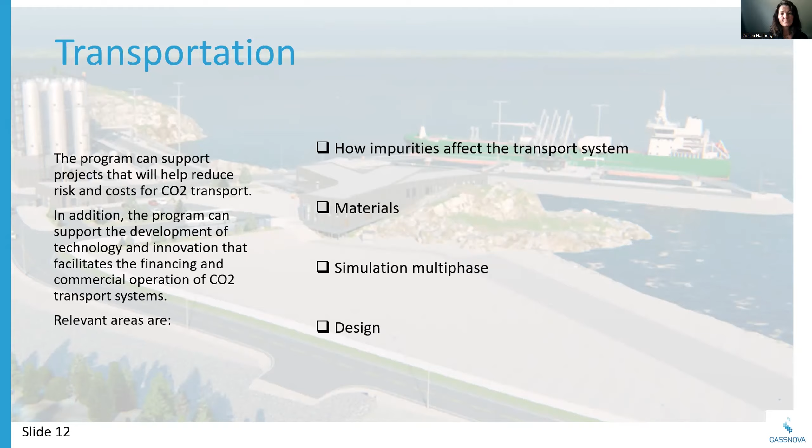Finally, it's the storage part. Research, development, and demonstration in the following 5 areas are prioritized. You have CO2 wells, where one should look into improving, streamlining, and securing well drilling, safe injections, and subsequent well plugging, and direct injection of CO2 from ships.

On the storage reservoir and cap rocks, CO2 injection strategies and water production from reservoirs suitable for CO2 storage are of interest, pressure control, cap rock, and sealing mechanisms. For monitoring, real-time monitoring is of interest, CO2 storage sites and the marine environment both, including, of course, storage operations, shutdown, and post-injection. And here one also has to look at risk and mitigation.

For the modeling and digitalization, it's looking into artificial intelligence, automation, to handle capacity, injectivity, sealing, monitoring, and flow properties, and also here as well, risk management. And finally, the social sciences, where you have simplifications and standardizations, looking into hubs where different storage sites can work together or get the CO2 from hubs. And also social science research, looking into legal matters and incentives that can contribute to a market for CO2 storage.

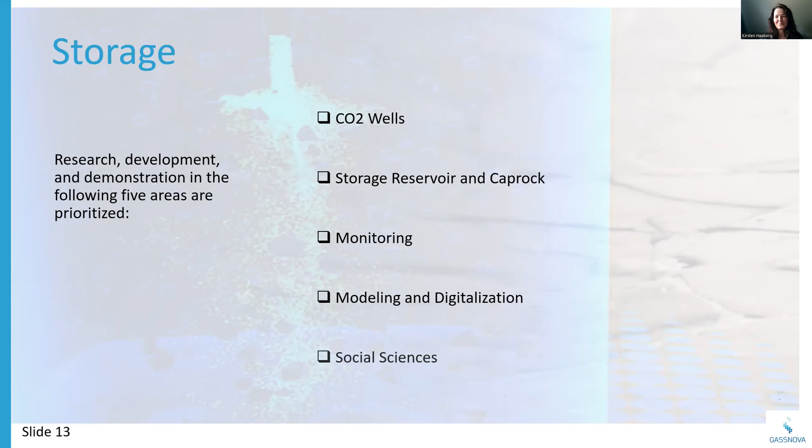Thank you very much, Kirsten. Interesting overview of quite a large body of work over quite a good period of time. This will be a fabulous help for everybody else moving forward.

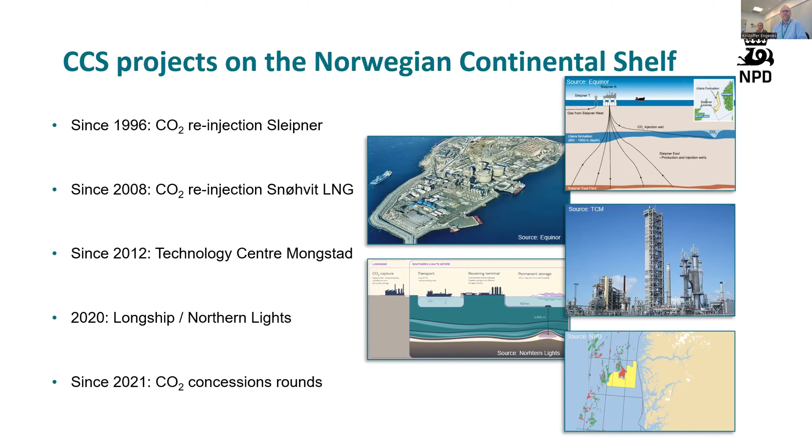The sedimentary basins of the NCS are generally well suited for CO2. So this is just a snapshot of the database that we have access to in Norway. This, of course, has built sound knowledge about geological formations such as saline aquifers and depleted reservoirs. All are considered candidates for safe storage. It is key that the reservoirs are sealed, obviously, such that leakage is avoided.

We have good control of reservoir seal pairs and other potential leakage mechanisms, such as fault patterns, fracture pressure gradients, and well integrity knowledge across many petroleum licenses, which are also important to be on top of. And to facilitate all of this, we have in Norway a well-established and available subsurface database of public data. This is hosted by us in NPD through the Diskos database platform. This should obviously be utilized by everybody actively in the evaluation of CO2 storage candidates in the future.

So the CO2 license definitions, just to repeat something you may already know: we have 3 levels of license definitions. One is a survey license. This is the simplest version that gives the right to explore for subsea reservoirs. It does not give an exclusive right to explore in the areas mentioned in the license, and neither does it give preferential rights in the assignment of exploration licenses for a subsea reservoir for storage. That means this is a type of license where you can go out and acquire data, but you will not get access to the area for further exploration and exploitation, which is the next level up.

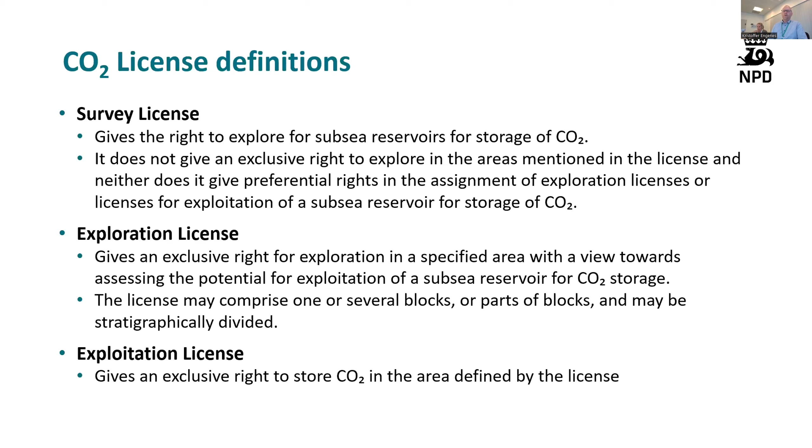The first CO2 license, so the first license for CO2 injection and storage, was awarded by the ministry back in 2019. This is the exploitation license EL001, which is operated by Northern Lights. This again consists of companies Equinor, TotalEnergies, and Shell. Following the approval of the development plan for the license, we noted an increasing interest for access to CO2 storage, and the applications continued to grow.

So for the CO2 storage application process, we have a so-called open door policy. This means that individual applicants seeking a license pursuant to the CO2 storage regulations can apply when there is a sufficient technical and business requirement basis. So it's fundamentally important that you have a technically robust plan and solution, but it has to be backed by a business requirement. That's why this is a kind of open door on a request basis as of today.

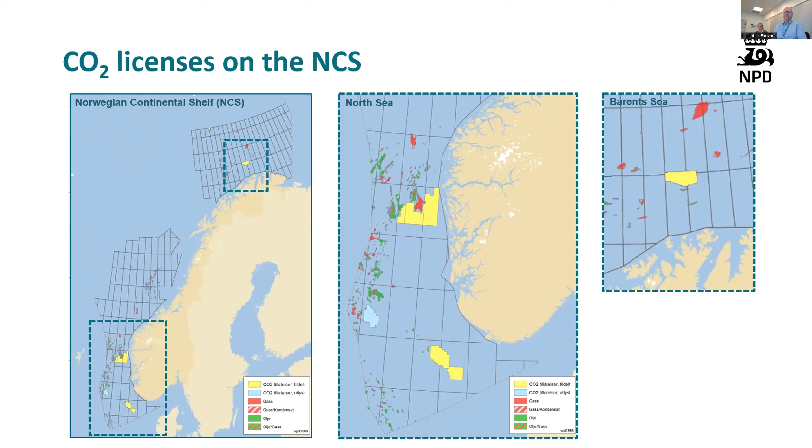So for now, 6 licenses have been awarded. All of them are in the North Sea, except one that is in the Barents Sea. There is an increasing diversity of industry players now engaging in this business, and so far 10 Norwegian and international players have secured acreage. In alphabetical order, they are Aker BP, Cape Omega, Equinor, Horisont Energi, OMV, Shell, Stella Maris CCS, TotalEnergies, Vår Energi, and Wintershall Dea. We expect the player picture to diversify even further going forward.

Okay, so this slide shows the licensing process as of today for both companies and the government. The company submits an application which needs to be according to the guidelines, and the MPE and NPD assess if the application is of sufficient quality. If yes, the area can be announced. And for announced areas, normally it has been given a deadline of 6 weeks for submission of application for a license. For both exploration and exploitation permits, financial strength and technical competence are essential.

And when awarding an exploration license, there will be arranged negotiation meetings, and it will be given an obliged work program. And when given an exploration license, the work program normally will include submitting a plan of development or a relinquishment.

So CO2 permit application requirements: detailed requirements are found in the guidelines for application of license. But main takeouts are potential for CO2 storage capacity, risk and probabilities, a description of the CCS project, geological and technological assessment, development plan, monitoring program and license work program, and environmental assessments.

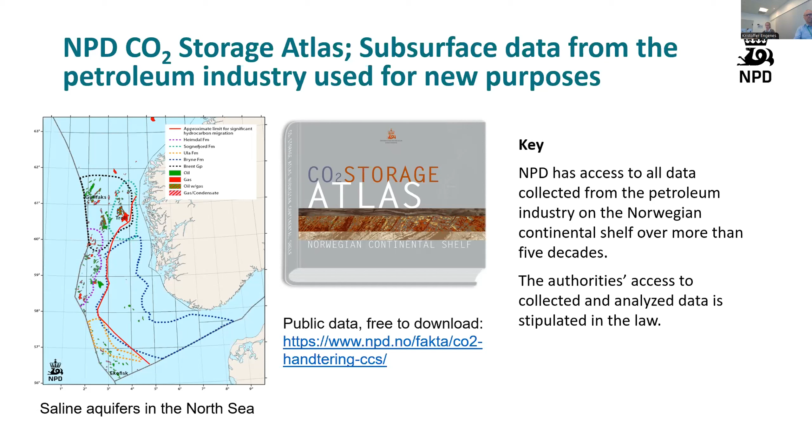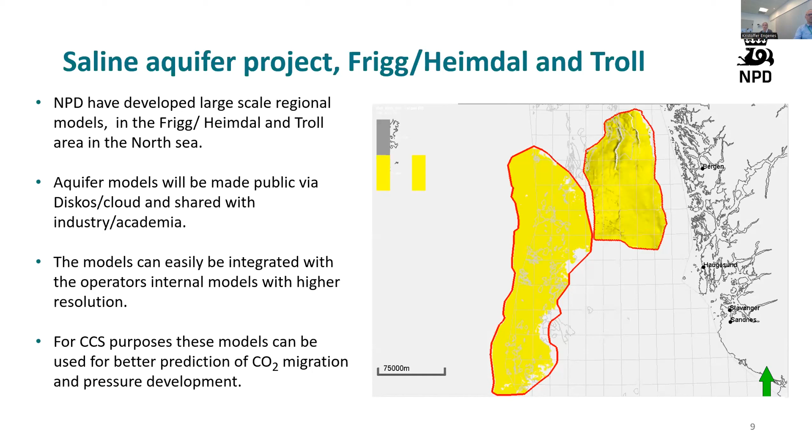So why CCS on the Norwegian continental shelf? We have the knowledge through 50 years of oil and gas industry on the Norwegian continental shelf. We have mapped, collected, and interpreted geodata. We have the experience. CO2 has been injected on the Norwegian shelf for more than 25 years, which we continuously learn from and are monitoring closely. And we have the potential to grow. Our evaluations show there is a potential to store large amounts of CO2 offshore Norway in well-known reservoir models.

And we have the regulatory requirements. MPE and NPD have established the regulatory requirements needed to support and follow up the emerging CCS industry. And we are ready. CCS is a key part of meeting our climate targets and decarbonizing the industry, and the knowledge and technology is ready now. So thank you.

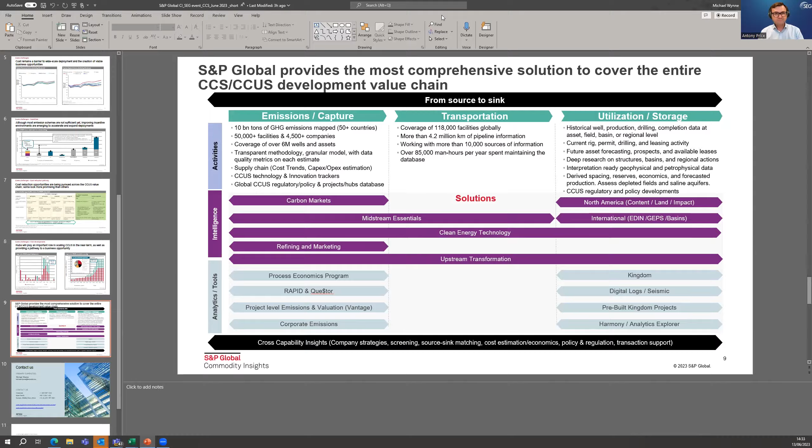So, 5,000 Northern Lights, Mike, that's a huge number. Yeah, you have to try and bring this thing into scale, Antony. At CERAWeek one year somebody was talking about the IEA paper, and I thought, I really do need to read that thing properly, because like many in the industry, initially I was a bit cross when it came out and just said stop it all now. And I thought, well, not really, because you're trying to solve one problem by creating a whole new set of problems, and that historically has never worked out well.

But what I did then was go and read their calculations on various things that needed to be achieved to deliver the 2050 agreements. And if you use Northern Lights as a useful unit of measure, 5,000 of them, it's as clear as day. Maybe we'll be somewhere between 700 and 1,000 at the end of the decade, unless there's a massive change in regulatory drivers.

And the thing that's at the back of this is there's no consumer engagement. We see all sorts of things around the world, environmental protesters, action groups. But when you go back to the consumer and ask, will you pay extra at the pump for clean, low carbon gasoline? The answer is no. If we look at the grades of crude out there now, increasingly traders have access to the carbon intensity associated with crude.